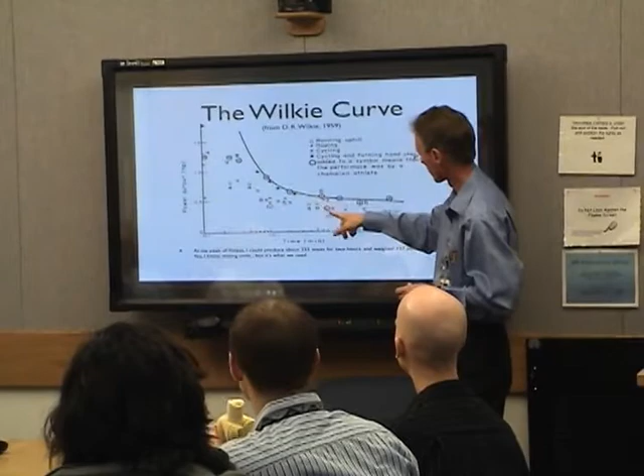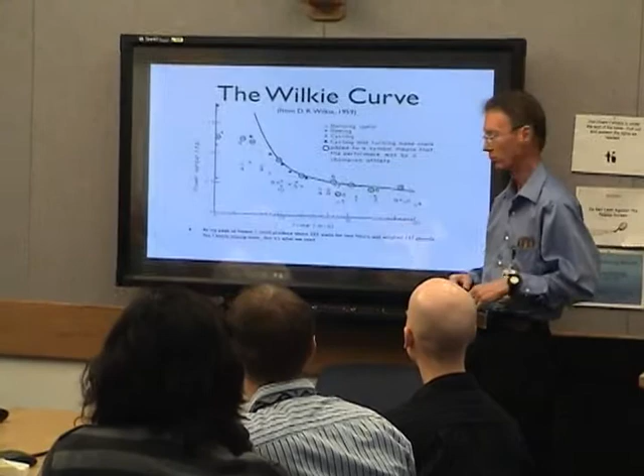He also tested some top athletes, and so any of the symbols on here that have circles on them show the performance of a championship athlete in different sorts of disciplines and stuff like that. To put a scale on it, in my case, when I was at peak fitness for the Gossamer Albatross, which is kind of a follow-on aircraft in 1979 that we flew across the channel, I could put out about 255 watts, which is about 0.34 horsepower for about 2 hours.

Now, one thing I specified here, I also said I weighed 137 pounds. That's one thing that isn't shown on Wilkie's chart: he's not showing the power output per pound, he's just saying how much power a particular athlete puts out. For human-powered flight, for a variety of reasons, the peak power is not nearly as important as how much power you can put out per unit of weight.

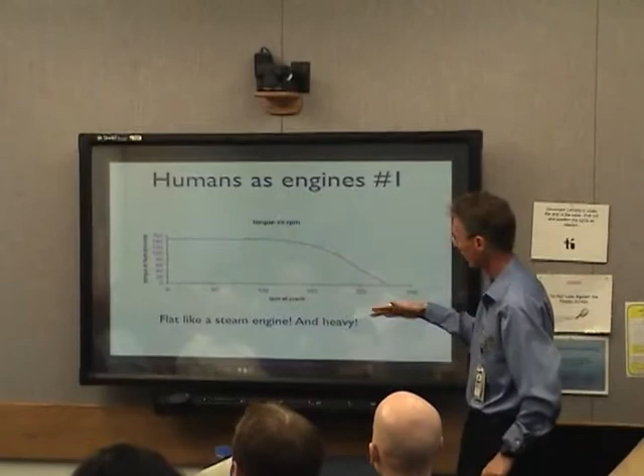So just looking at humans as an engine, these and a couple of other charts are just ones I grabbed off a website. And this is just a generalized kind of torque curve of a human. So you can put out basically as much torque at practically 0 RPM as you can at 100 RPM. And so your actual torque curve as an engine looks pretty flat, very similar to things like steam engines. And then as you get to higher RPMs, 150 or 200 RPM, that torque starts to diminish, just because all of you know that if you try to pedal really, really fast, you get to the point where you're hardly even able to press on the pedals.

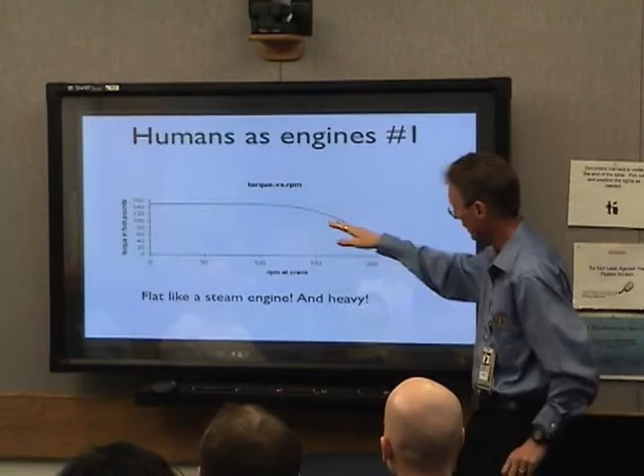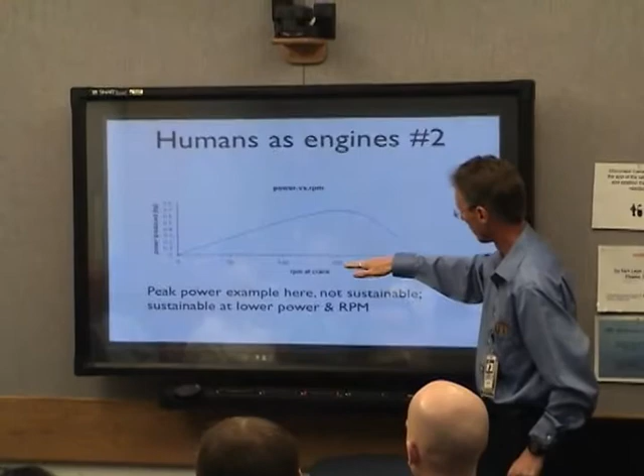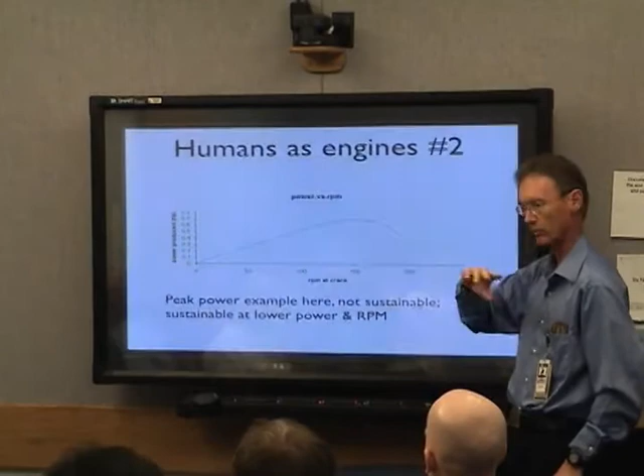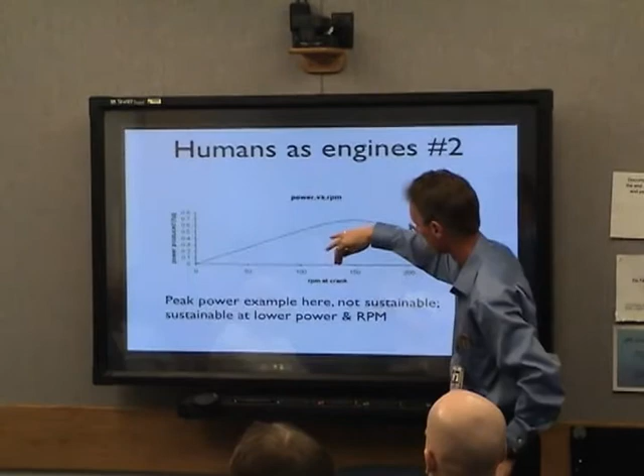So humans have this very flat torque curve, and they're pretty heavy as well. If you then map out what that actual power looks like, it's this fairly non-peaky, fairly low slope sort of curve that over a short period of time you'd have your max power around 150 RPM or so. This example really is for peak power. This isn't really for some sort of sustainable thing. But for sustainable power, you can basically just move the curve down and say that your maximum sustainable power would be somewhere in the region of like 80 to 120 RPM.

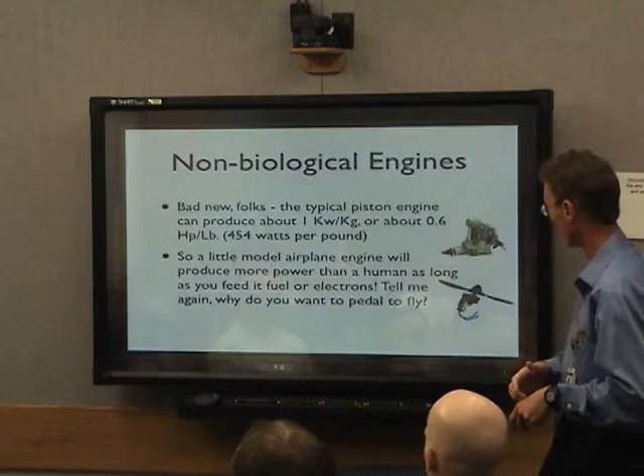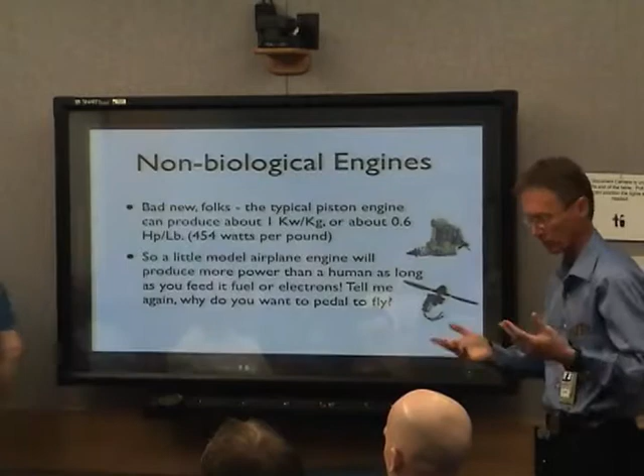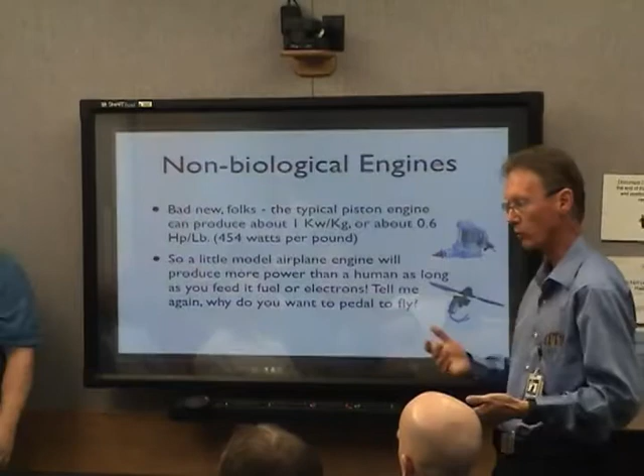Now, if you look at what non-biological engines can do, so here I am at my peak of fitness. I could put out 0.34 horsepower for 2 hours. A little model airplane engine can put out, let's see, like 60% more power than that, and only weigh, say, just a pound. So the power to weight ratio of little engines, either electric or gas engines, versus what a human can do, there's just no comparison. And so then the question would be, well, if you want to fly, why wouldn't you just fly with an engine rather than trying to fly with pedal power? Why would you want to do that?

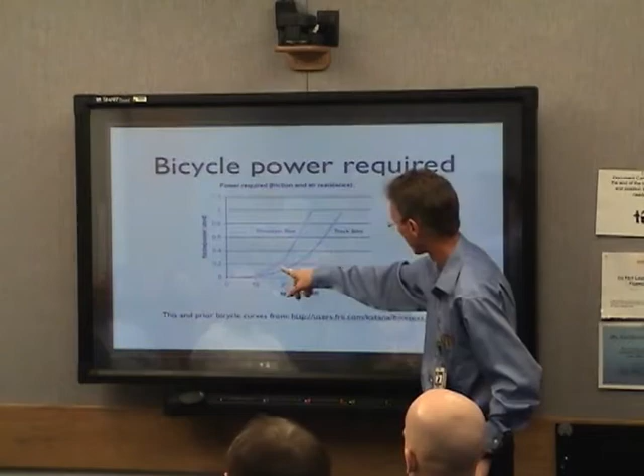To put some other curves on things, the kind of power required curve of a bicycle, and again, these are ones that I just kind of stole off a website that had some fairly simple diagrams, and these are just very generalized. But the power required on a bicycle is this fairly smoothly increasing curve, and it's dominated by air drag. And so for a mountain bike to go, say, 20 miles an hour, you might take in the region of 0.2 to 0.25 horsepower. As you go faster, because the air drag goes up as the cube of your speed, you're going to get to the point where going just a little bit faster takes a whole lot more power.

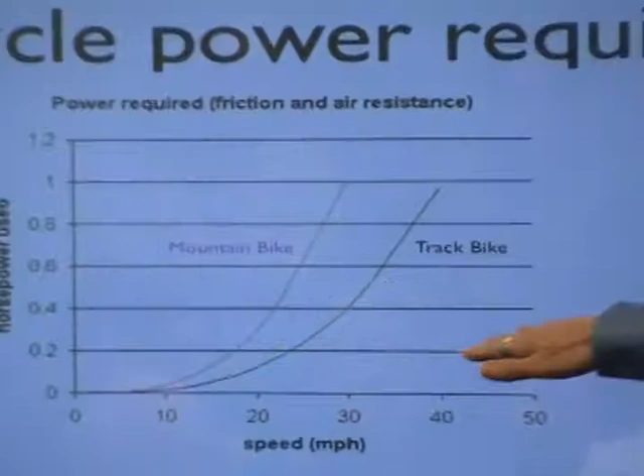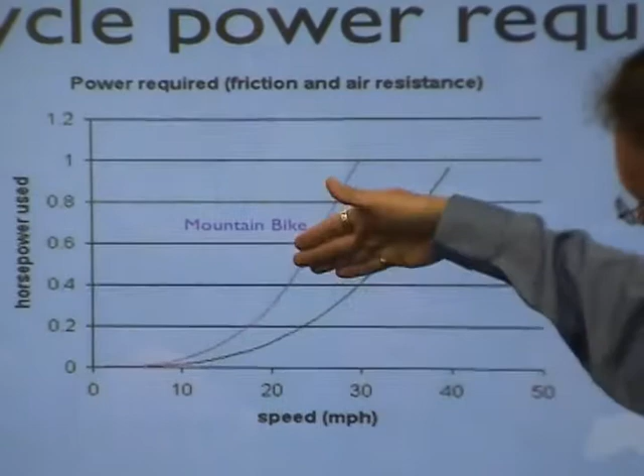And so all bicycles, whether a really draggy mountain bike or a track bike or even a streamlined bicycle, all have this same sort of looking power curve where as you go slow, it doesn't take much power. As you go a little faster, it takes a little more. And so depending on what your power capability is, you can kind of trim yourself to fit, and basically you can go as fast as you have power for.

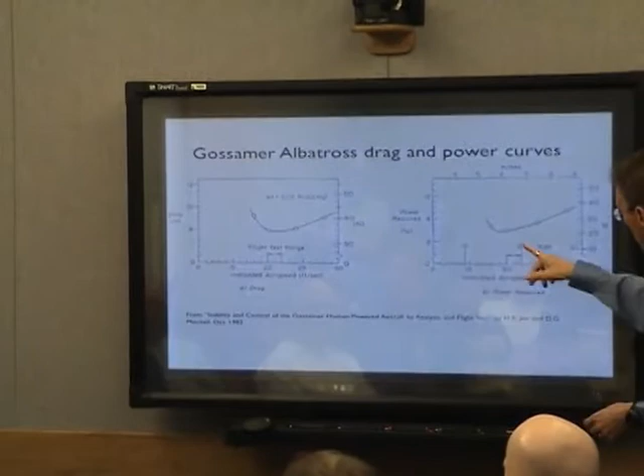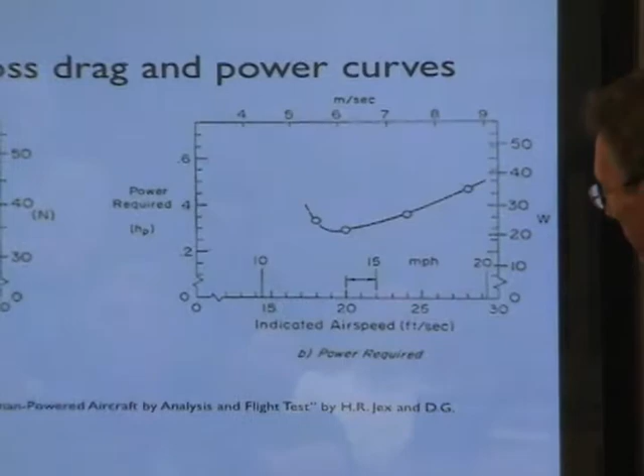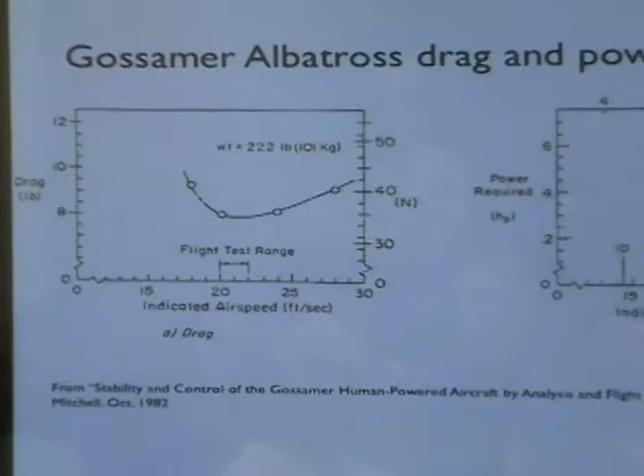Airplanes, unfortunately, are different. So the power required curve for an airplane, and this is out of an actual NASA study that was done in the early 80s on one of our backup Gossamer airplanes. The power curve and the drag curve is basically the same. Maybe the drag curve illustrates a little better. It is such that you have an optimum speed to fly where you're going to have minimal power. If you go a little faster than that, your power goes up a bit. If you go a little slower than that, your power goes up quite a large amount.

And this is kind of a runaway sort of thing too, in that if you're human powering an airplane and you fly just a little too slow, the power required goes up, the drag goes up, which slows the plane down because you've got not much inertial mass in terms of forward speed. Very quickly, within a couple seconds, the drag is just going right off the top of the scale. You can't pedal hard enough, and you're plummeting towards the ground.

So to ride a bicycle and fly an airplane are a completely different paradigm. On a bicycle, you just kind of go as fast or slow as you want to. An airplane, you don't have that luxury. You have kind of a minimum required amount of power, and if you don't meet that, you're not going to be able to fly at all. Now, because of that Wilkie curve, any human can put out this large amount of power for a short period of time. So basically what all this says is that any person can fly a well-designed human-powered airplane for a short period of time. The real trick is being able to fly it for a long time.

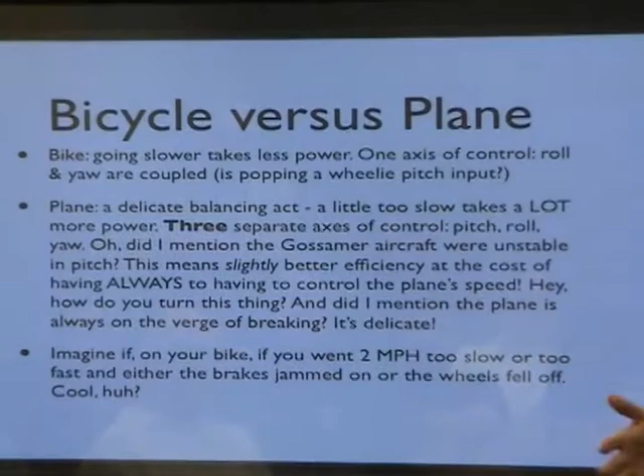So in summary, bikes, if you go slower, take less power. The control system is not particularly complicated. You've got, in effect, kind of one-axis control. You've got to worry about what direction you go. Whereas with an airplane, you actually have 3 axes of control that you're having to maneuver in real time. Also, with the Gossamer aircraft, and with any aircraft that you're trying to get maximum performance out of, you typically make it unstable, which is to say that if you take your hands off the controls, it deviates. It either slows down or speeds up; it does not have a nice trim speed where you can just take your hands off and fly. So you're having to constantly fly the plane and make little tiny corrections in terms of the speed.

Also, because having a really lightweight airplane is important, the planes are always kind of on the verge of breaking. So to put it in a bicycle analogy, flying a human-powered airplane would be like if you had this bicycle where if you went a little too fast, the wheels fell off, and if you went a little too slow, suddenly the brakes jammed on and brought you to a stop. So you have this delicate kind of balancing act that you have to go through. And now I'm going to show a couple of clips here from a DVD.